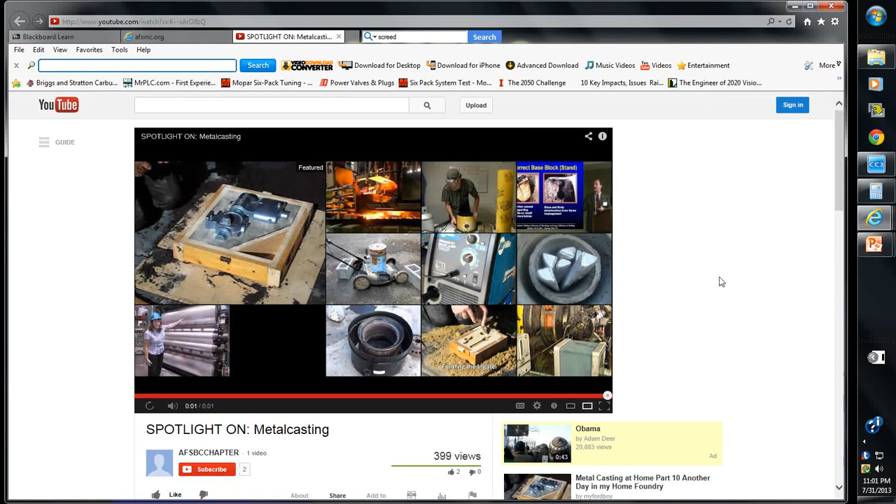Well, maybe not. I don't want to wait all day. I don't have time for this. I guess, no. It's got all these other castings, which we'll show you later. I've got some, but geez, you play that once and then you can't get it again. Boy, that's interesting. So anyhow, I'm not going to worry about it.

Let's go back to what we were talking about. I can show you that later, but the main gist of it is they'll show you these different castings, and we have a lot of robotic arms now that help move all this stuff and save time, so people aren't exposed to all the nasty stuff, and we can make things quicker and all that. That's why we teach all this automation now in our curriculum, because that's where it's all headed.

All right, parts made in this manner are called castings, so that makes sense. A factory that specializes in making castings is called a foundry. Of course, all this stuff will be on the quiz, so you should pay attention.

The 6 main types of castings are, and there's more than this, but these are the main ones: sand casting, they call it green sand because it's not totally cured and set up, so it's not really green in color - you'll see that it looks like red clay. Shell molds, permanent molds, investment casting, which has been around forever.

Plaster, you use gypsum, that white plaster, and it gives you a nice smooth finish. And then die casting, so you want to speed it up and do some die casting with the different pot metals - metals that melt at a lower temperature.

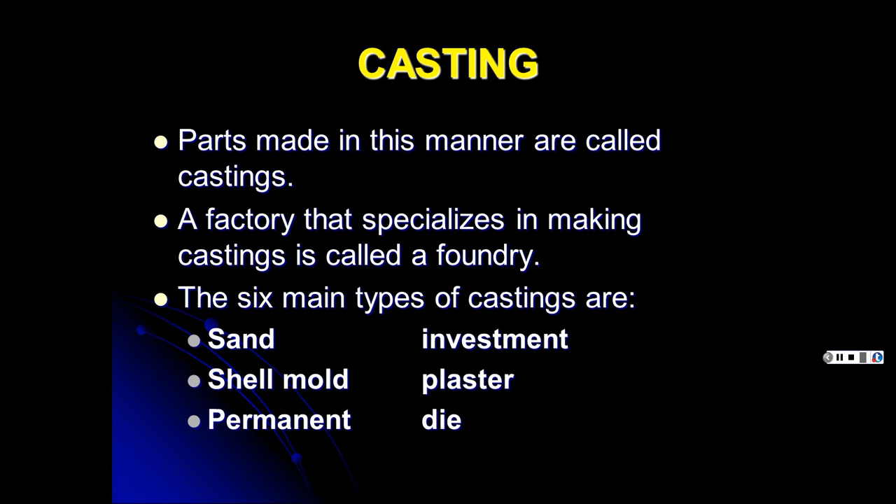Alright, so the different equipment, again, I think I asked you all these. I give you the definitions, you have to tell me what it is. Let's see, a mulling machine is used to thoroughly mix and recondition sand prior to making a mold because it clumps up, so you got to break it back up so it's not all clumped up.

And then a riddle is like a wire mesh, wire screen sieve that is used to separate the big chunks of sand from the smaller granules. I'll show you a video so you'll understand what this is all about. So that's a riddle. Riddle me this, Batman. Okay, so anyhow, why don't they just call it a sieve?

Yeah, I don't know. Flask is the frame that holds the mold. There's 2 halves of the mold - the top part and the bottom part. The top is the cope, and the drag is the bottom. You can remember that because you're always dragging your arse, right? So that's the bottom half. And cope, you have to cope with things, you have to use your head, so that's the top half. You should get that right on the quiz.

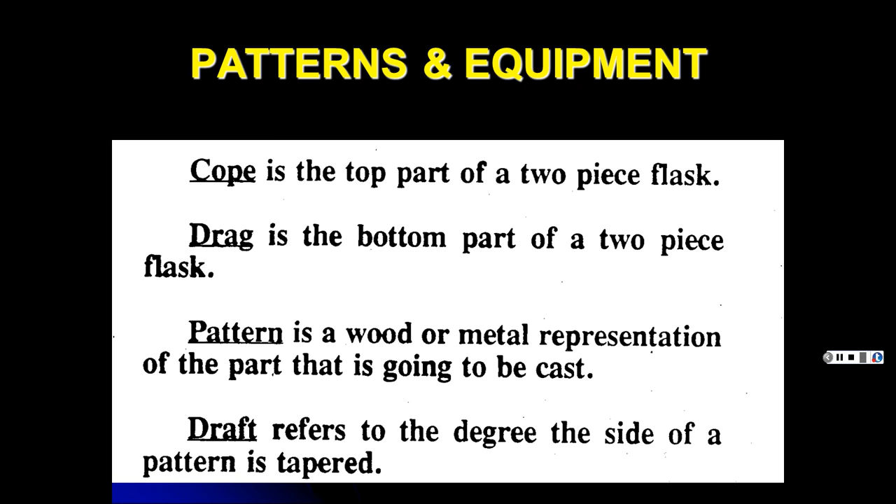Pattern is a wood or metal representation of the part that is going to be cast. So you have this pattern and it's cut in half because you'll see when they do the 2 molds and then you pull them out. So then when you put the 2 mold halves back together, that way you can take out the pattern. Then you have a hollow cavity, and the molten metal will go into that hollow cavity created by the pattern. You have to have some type of draft angle or you can't pull out that pattern if it's perfectly square. You'll see what we're talking about in a minute.

Then you have a shrink rule. Is that a rule that has shrunk over the years? No, what they're saying is when metal's hot, it expands. So you got molten metal, then you pour it into your mold there. And what's going to happen? Well, that metal's going to cool, it's going to shrink, and depending on the metal, it shrinks so much per inch. So there's different shrink rules.

One is for every foot, it's an 1/8 inch bigger, and one, it's for every foot, it's a 1/4 inch bigger. So that way you're intentionally making your pattern bigger than it really needs to be because the metal's going to shrink later. So anyhow, that's what a shrink rule is - it's taking into consideration how much it's going to shrink.

All right, then your parting compound is a fine powder, like talcum, something like that. There's different types we'll talk about. That is used to keep the molding sand from sticking to the pattern. You'll see in these videos they pour that white, talcum-like powder, and it's because you'll have those two halves and you don't want them to stick together until you pull your pattern out.

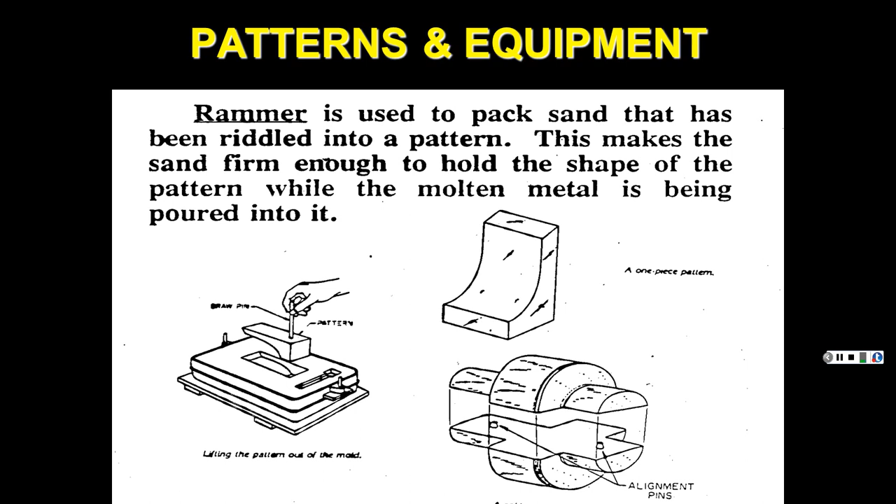Then you have a gating system. You can't just pour it right into the mold. You've got a sprue, and the riser, and all that gating system.

The reason you have that is with any type of metal, there's impurities and junk in it that floats on the top, slag and all that stuff, just like in welding, we talked about slag. So when it gets really hot and goes into your mold, all the impurities want to rise up. So then you have that riser, and all that junk's up there, away from the actual part in the middle.

You have to cut off these parts later, but that keeps all the impurities and junk out of your precious little part that you're making.

So then you'll form a pouring basin, because you'll notice with the ladle that holds that hot molten metal, it's hard to get it exact when you're pouring. You want to stay away from that heat and the flames and all that. You'll see they've got tongs and holders holding that ladle and pouring it for people.

Or if it's a small amount, you can do it by hand. But again, you don't want to get real close to it because it's super hot, and it can splatter. You don't want to get that all over you. I don't care what kind of leathers you're wearing and what have you, it doesn't feel good to get burned with molten metal.

So you have that kind of tapered, and then you have the sprue that goes down into where your pattern's going to be. Again, this is all stuff that you've relieved, you've removed that sand out of your mold, so that way you've got a place for all this stuff to run into your hollow cavity that was created by your pattern.

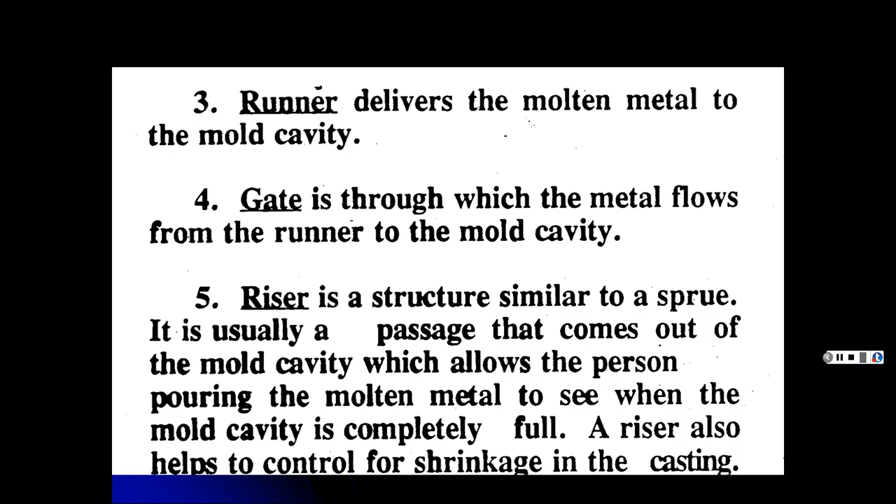Alright, so the crucible again holds your molten metal and pours it, after you've heated it up in your furnace. You can have electric furnaces, gas furnaces, you name it. There's all different types of foundry setups.

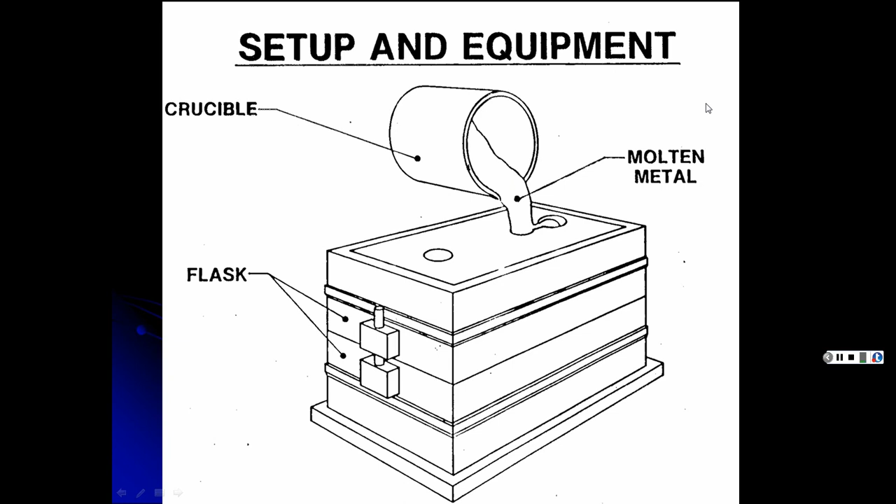But again, the crucible holds your... and the flask holds the two parts of your... I keep thinking flask, I'm sorry, I get confused sometimes. I think of a flask as something where you have a nice liquid that helps the day go by, hidden in your sport coat pocket, and you take a few swigs. So no, that's not it. That has the mold, the liquid in it. No, the crucible does, here when we're talking casting. Alright, and you pour your molten metal from it. So sorry about that. Anyhow.

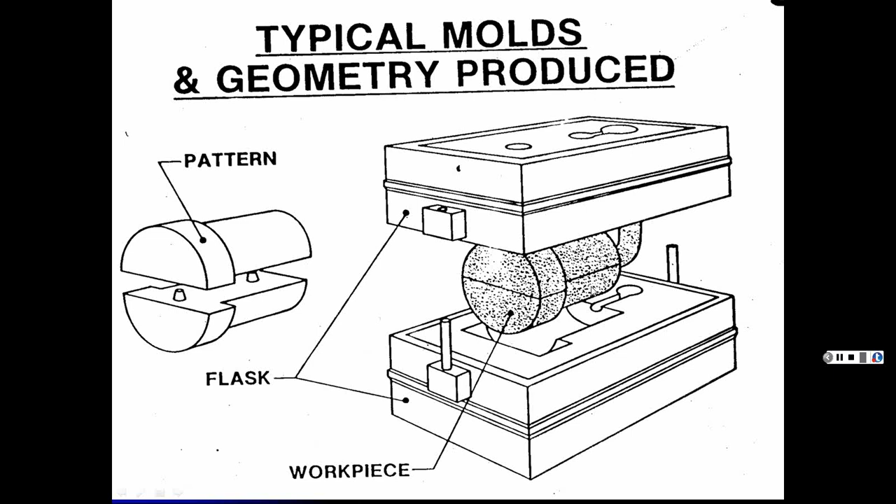And again, there's your pattern, see the alignment pins there, and they're just put together. Then you have to take these apart, take out the pattern, and put it back together again to leave the hollow cavity. But while you're doing that, that's when you also dig out these gates and runners and all that stuff, your whole gating system, which they'll show you in the video clips.

Alright, keep moving here. Let's see this one. This one is, I think, from the University of Memphis or one of those places. They made a YouTube thing, so it's pretty good. You'll see a few things that are out of whack, but it's okay.

And then this one shows you a place where they have some more equipment. It makes it easier to make a sand casting. So let's see if this works today. Hopefully. Alright, let's see. Boom, boom, boom. Yeah, here's their furnace, a gas furnace.

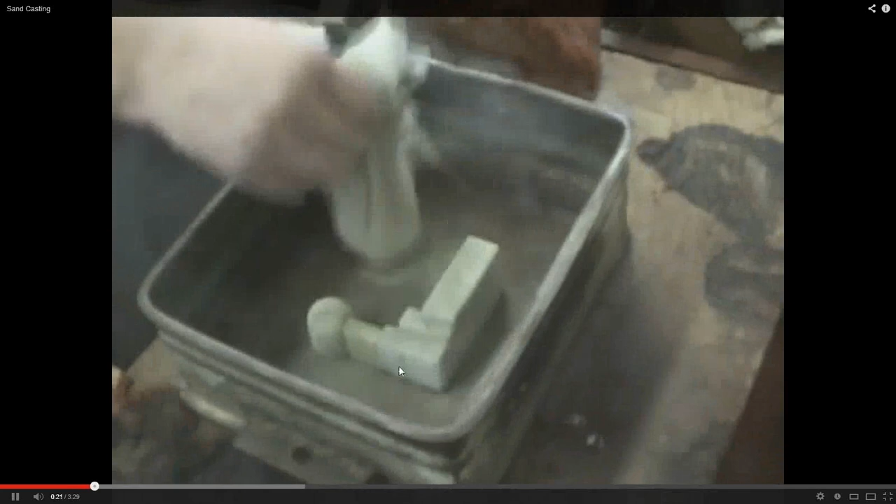Oh, they've got music here. There's their precious little part that they're going to make, but that is their pattern. Now they're supposed to keep that straight, but anyhow, usually you put it down with a little of this material to keep it straight. But that's okay, and they put that compound around it, so the mold release I guess.

And see, here's the riddle, and then they've riddled that in there. And see, it's not really green sand, okay? They screed it off to make it flat there. They're melting whatever scrap they had left over.

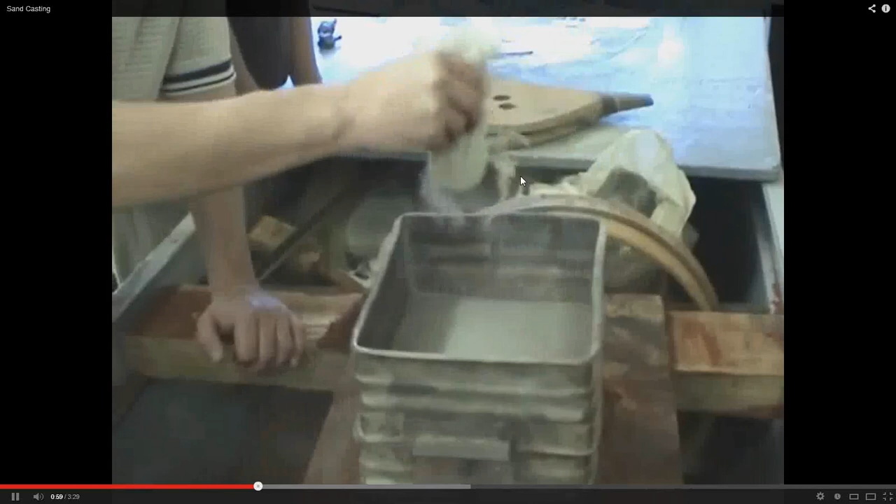Okay, and there's their pattern. They're putting some more on so that way it won't stick. They're riddling in the green sand. As you can see, it looks more like clay, but it's sandy.

But usually they have an oil binder to it. And see, now they're making their pouring basin and their sprue. And there's their riser.

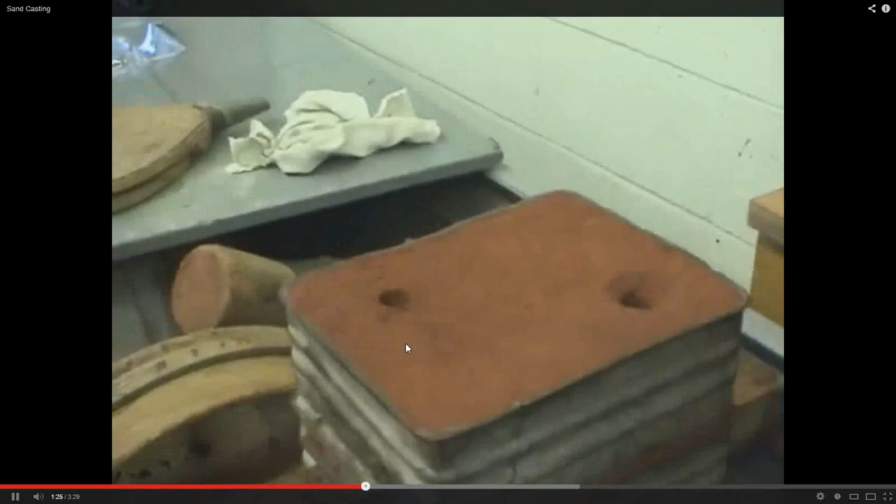And they take them apart. They're going to take out these patterns. But first, they're making a gating system, so the runner goes into it, and then it just goes right in, and then they have to press that down so it's not going to come apart on you.

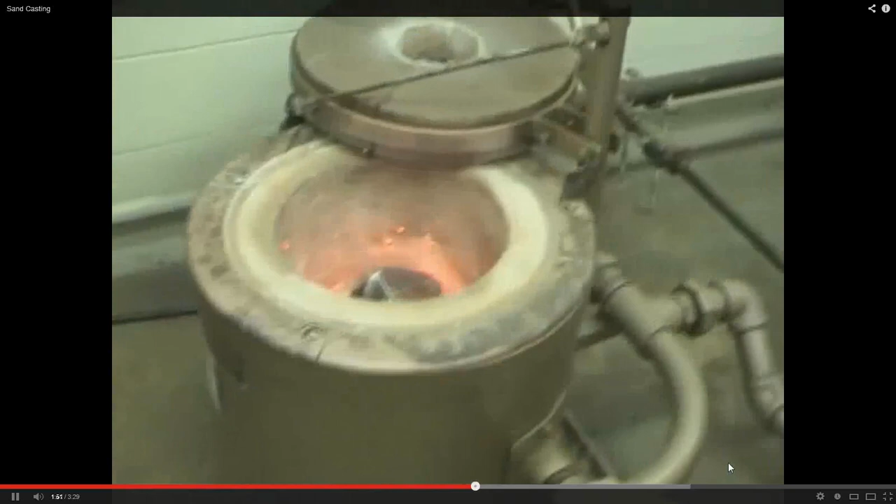You'll get it ready. And you always have a piece of wood or something under it. Same for when they put down their crucible. You should never put a hot crucible down on concrete, because concrete is cold.

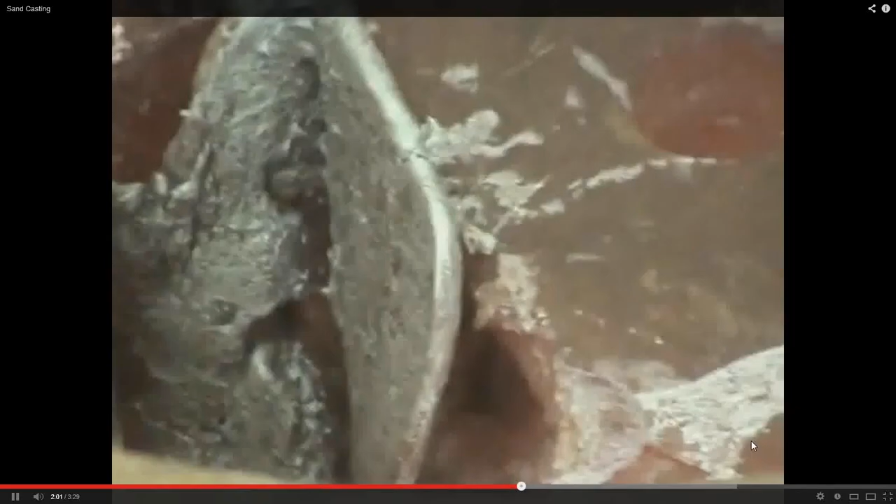And the heat and the cold, what happens to concrete? Concrete explodes. So they got lucky here, but I don't know if I'd do that. Maybe it's treated with something, but you just don't. Oh, I see it's got a metal piece under that, but still, that's pretty hot.

Pouring the aluminum in there. See, then there's the riser that filled up. And he's got sneakers on. Is that a wise choice?

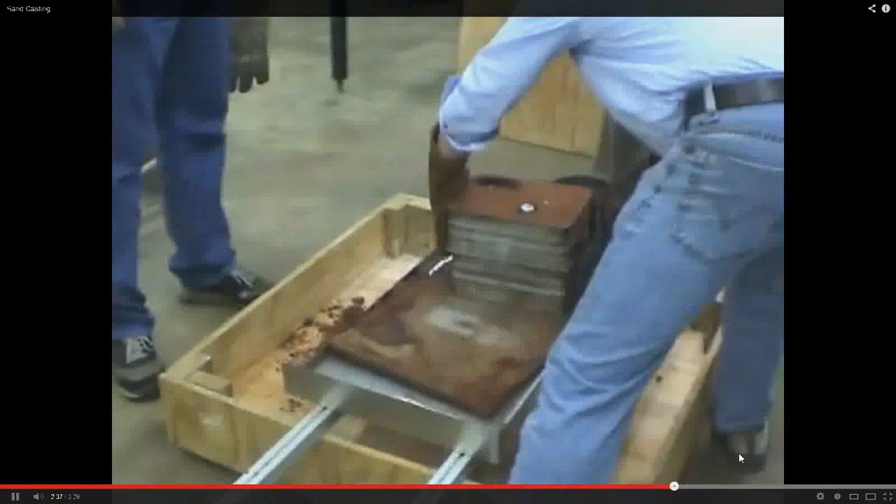They do have these covers, but still, I would have more protection. Everybody always wants to take it out real quick. Your best bet is to, if you can, let it gradually cool, and then the molecular structure and everything is good. But they're just showing you how it all works.

There's all this gating system that they'll have to cut off, the riser and the... A little too much music there.

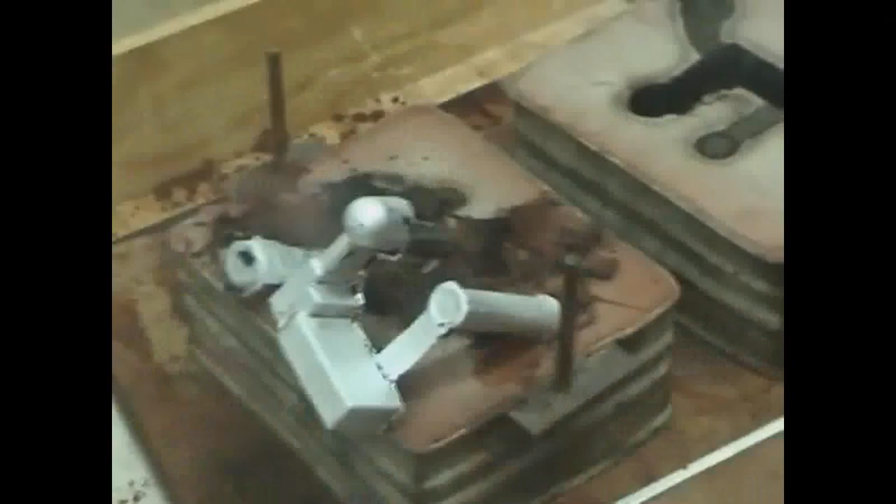Alright, but anyhow, there was their pattern, and then there is their actual part there. Not bad, it came out good. Then they're grinding it all down, sanding it all down, making it look nice. I don't know what they're doing with it. Hopefully they're making something with it.

But anyhow, enough said there.

Alright, so we'll make this smaller here. Let's get back to reality here. Alright, and the other one you will notice, you will see they have some equipment that makes life a lot easier.

This video shows the sand casting process to make a mold to produce aluminum castings. This particular item is a handle for a snake catcher. The match plate makes 4 handles at one time.

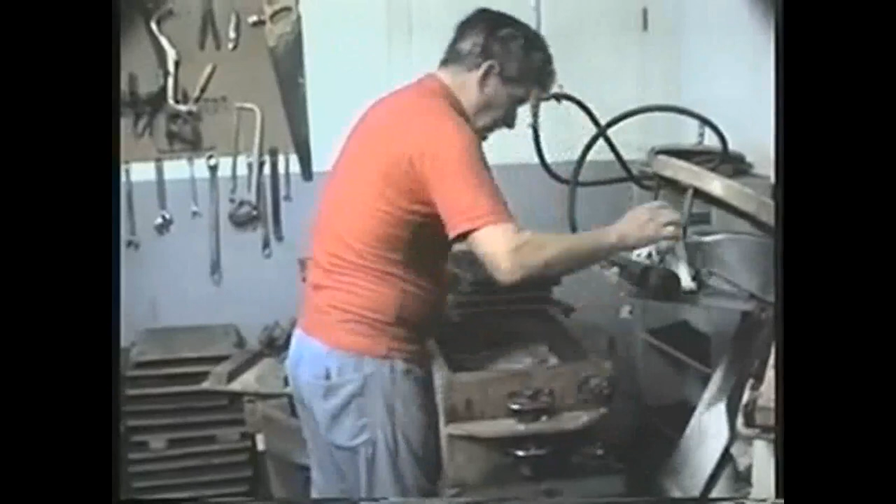Isn't that nice? Once the match plate is set between the 2 halves of the wooden flask, the molder dusts a non-silica parting compound on the pattern so sand won't stick to it.

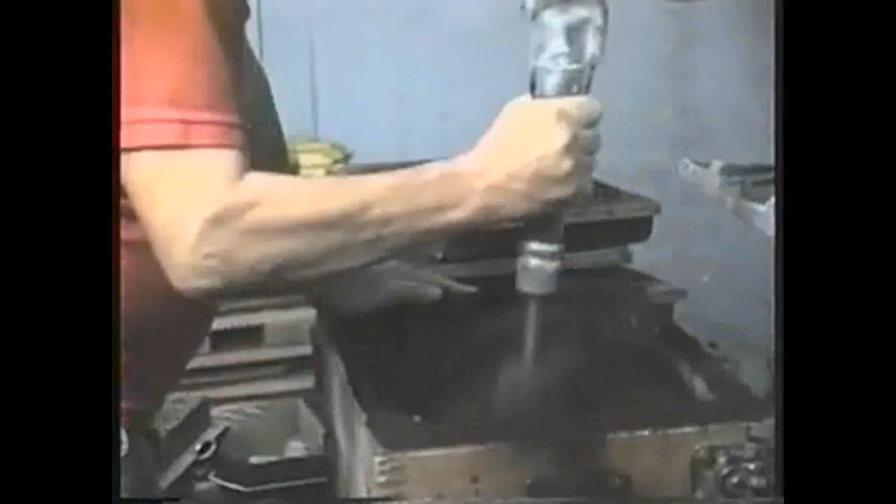To get only small particles of sand against the surface of the pattern, he riddles moist sand, which is coated with bentonite clay. The clay bonds the sand grains together so the block of sand will not crumble. There you go. He uses an air rammer to compact the sand.

That's much better, a better setup here. Now this is a better sand where it's got the bentonite in it.

To further compact the sand, the jolt squeeze molding machine jolts the mold. Yeah, there's the jolt. It sets on a bottom board which will end up underneath the mold.

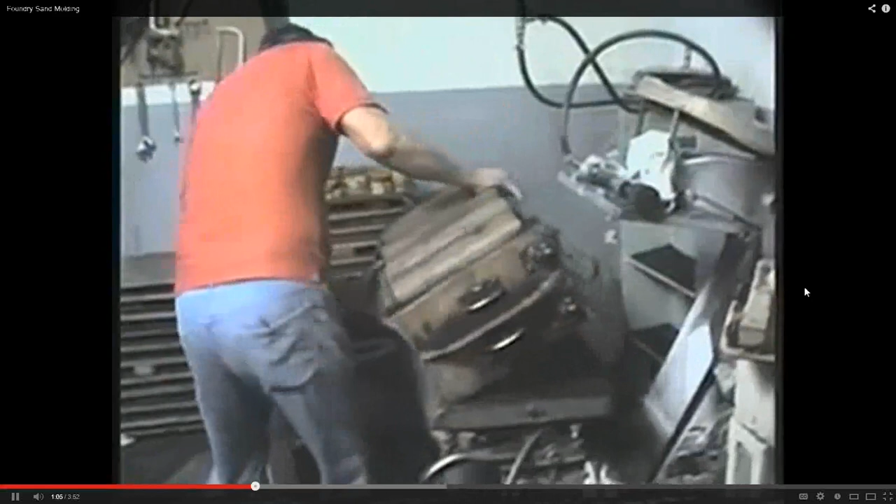That way they don't stick. He's riddling it in there. Oh, this guy loves to make the job right.

To make the top half of the mold, a cope, he repeats the process: parting dust, riddling facing sand, and compacting backup sand.

That way he gets it. He sets a squeeze board on top of the mold. The jolt squeeze machine pneumatically squeezes down on the squeeze board and up on the bottom board to further compact the sand. Can't beat that.

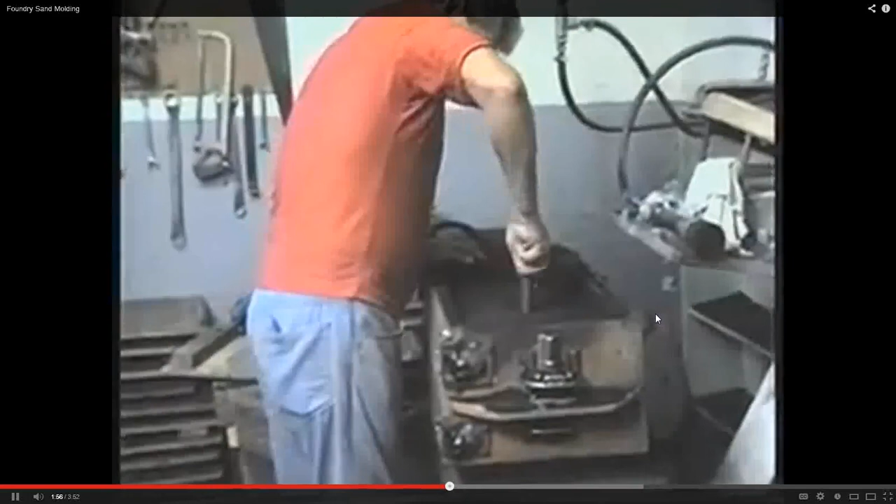The top squeeze board left a depression on top of the mold for a pouring basin. Yeah, look at that. The brass tube, which is pushed down to the match plate, cuts a sprue passageway for molten metal to enter the mold.

An air vibrator attached to the match plate helps prevent sand from sticking to the pattern. When lifting up the cope, or top half of the mold, alignment pins on both sides of the flask allow a perfectly straight lift.

Yeah, because if they get crooked, like I said, it throws it off or it breaks off the sand. So then he's cleaning out all the rest. He's got compressed air there.

Yeah, this is set up just to make castings. The same alignment pins guide the match plate when it is lifted. It kind of vibrates a little and gets it up, and it's got air again, compressed air. He cleans it out, and then notice here.

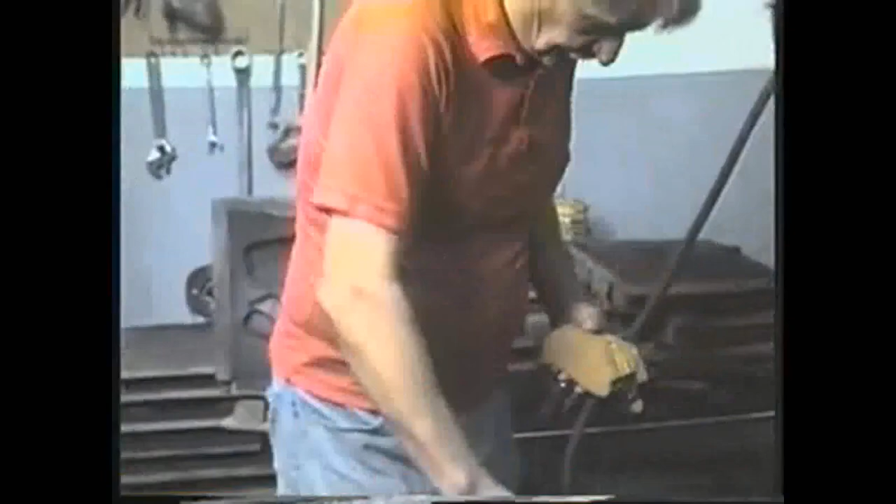They don't want to make those handles solid metal, it'd be too heavy. Each of the four castings, snake catcher handles, has a slot for a trigger. This slot is formed by setting hard resin-coated shell cores in the mold.

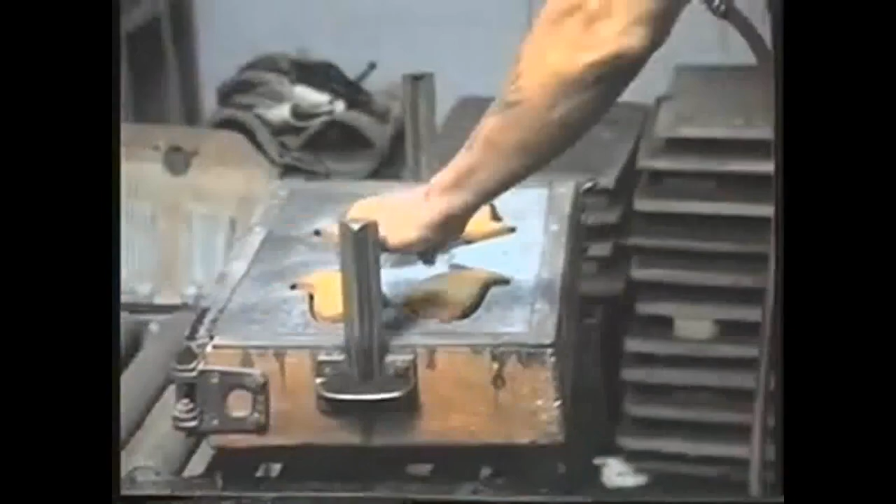Where there is a core, metal will not fill the space, hence a slot. You don't waste all that metal, and then it's lighter. By the same token, any loose sand in the cavity will prevent metal from completely filling the cavity and will cause a dimpled surface. Blowing away loose sand before pouring the metal is very necessary.

The two halves of the mold, cope and drag, are aligned by the flask guide pins. By unhinging the flask and removing it from the mold, the flask is ready to make additional molds. See, when he does his pour, he's got a whole bunch of them he can pour at once.

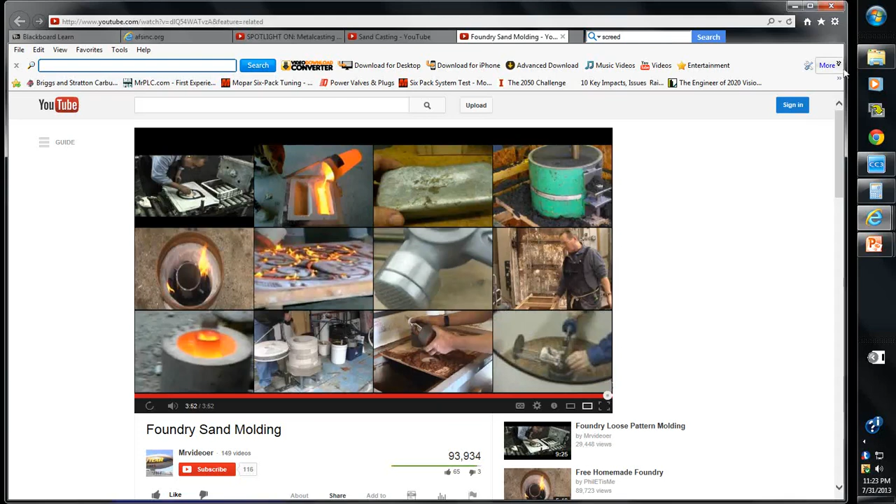All right, so that kind of gives you an idea what all of this mess is about. Sorry about that one. Okay, anyhow, let's get back to reality here.

So sand casting in general, there's sand in there, so you'll notice the texture is rough. Like if you look at castings for our machines, they kind of feel rough because they were sand castings, because it's the quickest and easiest way to make those parts as fast as you can. It does have a rough texture, and usually that's fine, it doesn't matter. If you want, you can machine it later to make it smooth, but in most cases you don't have to if you're just making a big base for a machine.

It utilizes gravity to feed molten metal into a non-reusable mold, as you saw what we did there, because of the sand. But then you can break up that sand and reuse it again.

Sands contain binding materials - we talked about the bentonite and the oils in them. It requires a reusable mold pattern, which you can pull out and leave that cavity. It produces a parting line on the workpiece, and the parting line is where the two mold halves go together.

It's going to be a little rough, you just can't help it. It requires drafts - you have to have draft angles, or you can't pull those patterns out without breaking off some of the sand and everything else. It produces rough textured surfaces, because sand is rough.

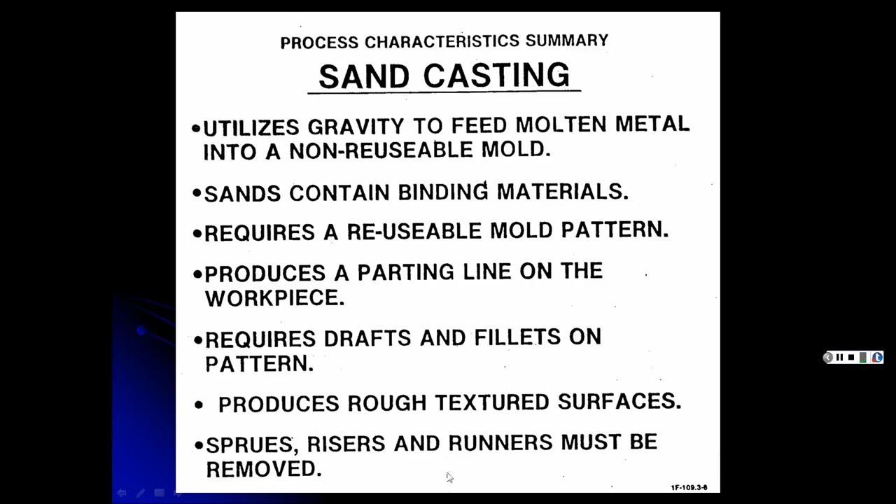And sprues, risers, and runners must be removed later. You cut them off and then melt them down so you can use them for the next one.

And again, that jolt squeeze turnover machine, you saw that in action in the last video. So that's what they're talking about, how all that worked - it just makes your life a lot easier, really compressing it perfectly versus somebody there with a stick trying to get the same equal force.

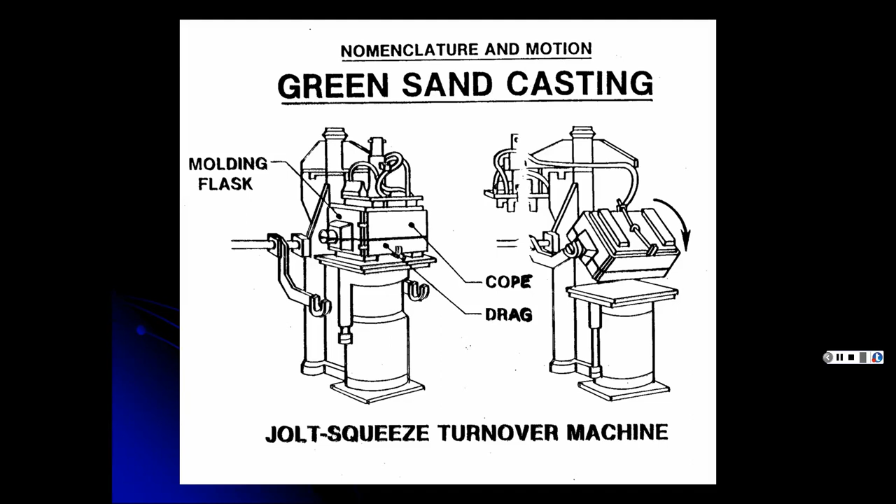What that does is put pressure around your pattern so you don't have loose sand around there, because when you take them apart, you may have a spot where it didn't compress the sand enough, and that's going to make a bigger area because that sand will fall out, giving you a bigger casting than you need - then you've got to grind and machine all that down. So that's why that's important, and if you do this for a living, yes, this is nice.

Different types of patterns, because you're going to remove them. It can be wood if you're just making a low production run, because the wood will wear down eventually if you're making a lot of these. It can be metal, aluminum, iron, steel. You can also make plastic epoxy resins if they're really complex.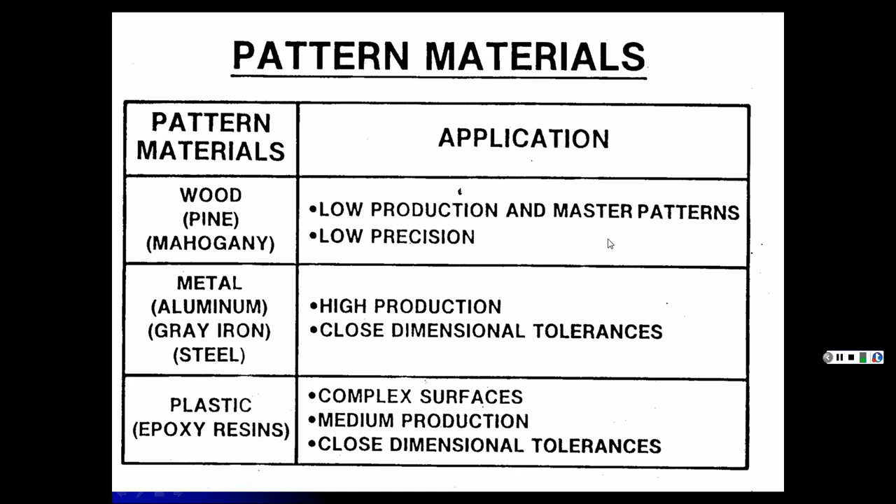Again, this stuff is going to be pulled out. A lot of times we can make molds out of flexible plastic, and then not have to worry about draft angles - just bend the plastic mold and pop them out. But again, we're not talking about that here, we're talking about sand castings. These are usually typically for bigger, larger parts and what have you.

Process capability, accuracy of patterns, including the cores and inserts - if it's done well, then that's less you have to machine later. You have to worry about casting shrinkage, so you got to make sure you got that under check. Pattern smoothness, how smooth your pattern is, but you still have got sand to deal with, so you're still going to have some rough parts there.

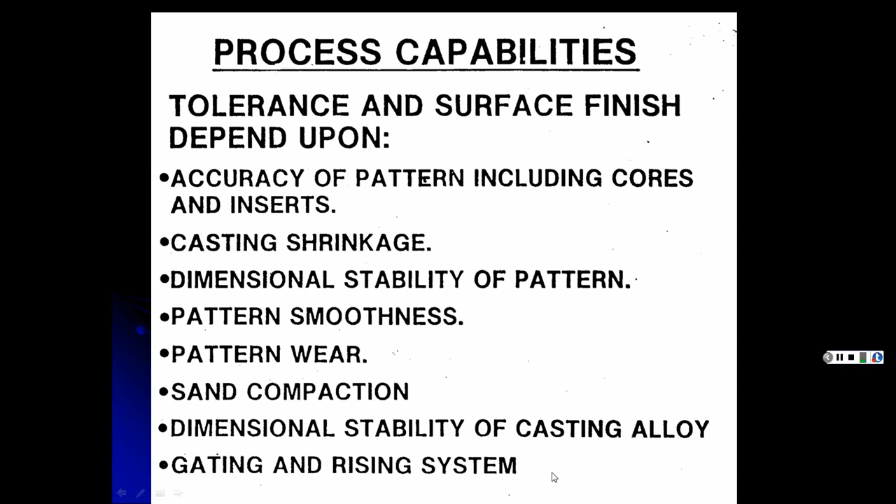So then your gating and rising system, depending on how well you have that, if you're getting enough metal in right and correctly to fill up that cavity before that metal cools too much. It's amazing how the gating and rising systems work, and how the craziest looking ones seem to work the best. It just really doesn't make sense sometimes.

Core sand castings - that's for when you make it actual out of sand as well, the cores, those hollow cores that are going to go in there. Well, they're not hollow, but it's going to make it to where you're putting that sand in the middle of where that pattern would be, but not the whole thing, not filling up the whole thing. And so that's allowing for hollow parts that you wouldn't have to machine later.

For instance, an engine block, you've got that casting, but it's not all one big solid piece of cast iron. They put cores, let's say it's a V8, 4 on one side and 4 on the other side. And then all they got to do is maybe machine it a little bit and hone it. But all that material is not metal. Can you imagine having to machine all that out?

Well, sometimes they do for exotic engines made out of certain aluminum alloys. They take a big block of special grade aluminum and machine them all, especially for a lot of those Top Fuel and funny car engines. But that's, you're making a lot of money off of it. This is something, you know, a car, you got to keep down the prices. People aren't going to pay 20, 50, 100,000 for a motor.

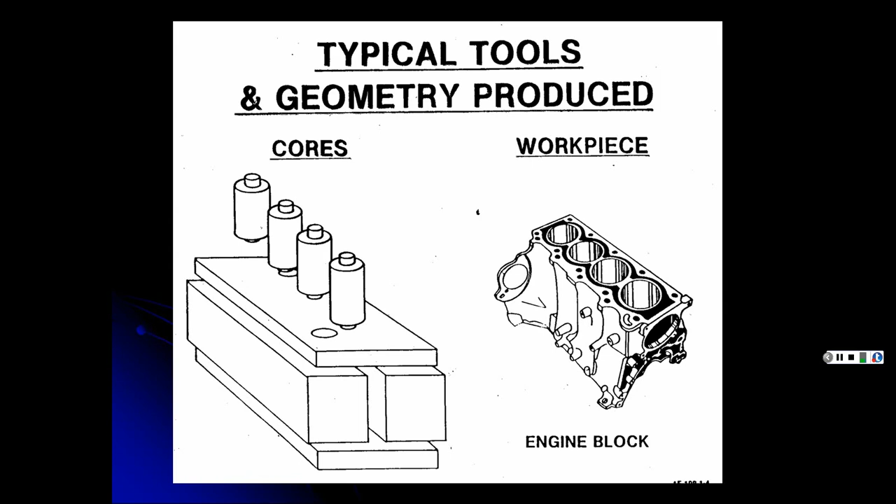All right. Yeah, this shows you the cores and where they would go in there for where your cylinders are.

So core sand castings utilizes core sections to form complex molds. Cores are made of hardened or baked sand. It produces shapes unattainable through other casting processes. It's a low production process. Cores are assembled with glue or steel bands sometimes, and can form parts requiring more than one parting line because of the way that it's all put together.

Then we have no-bake mold casting. This is a process wherein molten metal is poured into a non-reusable mold made from a mixture of sand, quick-setting resin, and catalyst, and held until solidification occurs. What this does is it keeps it all mixed up, you know, like it's an epoxy. And so if you pour this all in there, it's going to form right around whatever it has to, and you're guaranteed a nice, perfect casting.

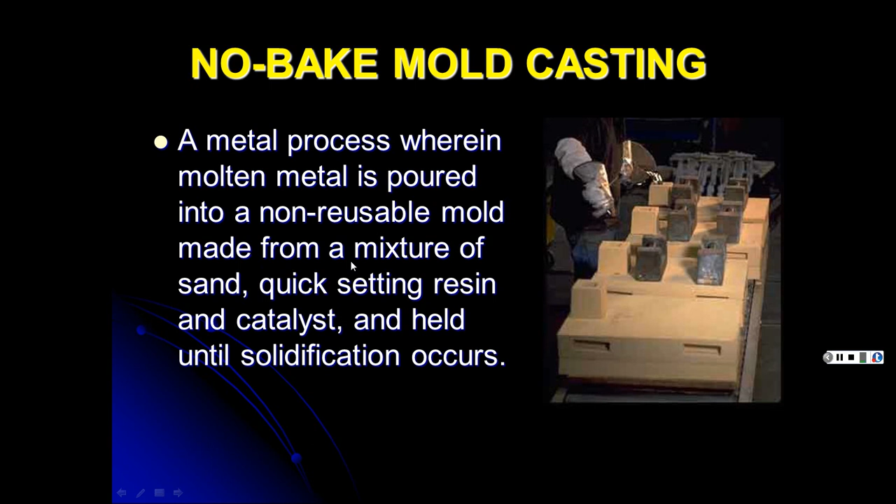Because with the sand casting, the green sand type, you could still, when you're doing that and moving it around, a piece could break off or something - it's not perfect. But since this sets up just at room temperature because it's got a catalyst to it, you're going to get a perfect casting every time. Of course, it's more expensive because you can't reuse this sand that's set up, it's done. So it just depends on what you're trying to do. If it's expensive parts with special alloys, you got to pay the price. Or let's say your cores keep falling apart or something, and you want to make them out of no-bake, hey, that's fine.

Same thing, no-bake versus sand casting, tells you the reasons for it. It's more expensive, but it gives you better, closer tolerances. It's a finer sand mixture, so it gives you a smoother finish, and again, they usually come out perfect every time versus a sand casting. It's kind of rougher, and sometimes they don't come out perfect. But the drawback is, again, the no-bake is more expensive.

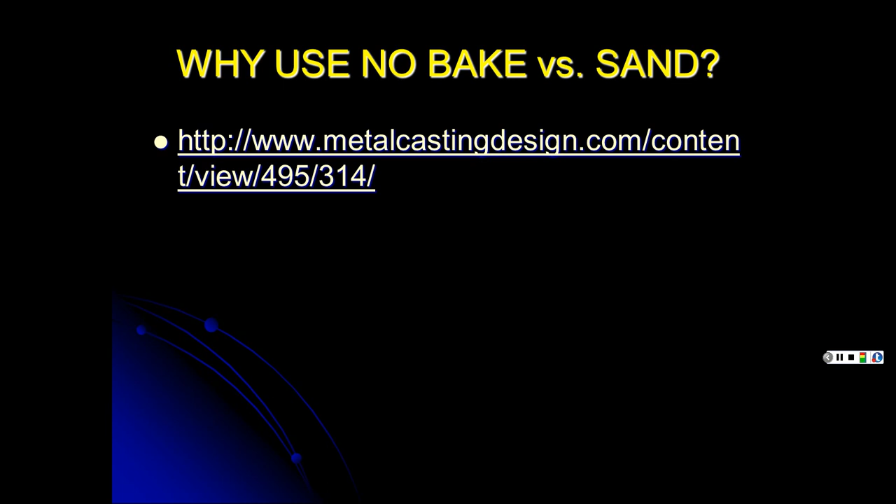Why they call it no-bake is you'll see that we're going to do another casting process where they heat up the molds or bake the actual patterns that they make and melt them out of there. There's some ovens involved ahead of time before they use a furnace and pour the molten metal in. So that's why they call this the no-bake. It's where it's mixed with a catalyst, you don't have to heat it up or anything. So that saves money there, but then you're having to pay for a catalyst, which is expensive.

So no-bake mold casting utilizes gravity to feed molten metal. It's the same as green sanding, except for molding, sand is poured into the mold instead of being rammed. Okay, so that way it's poured, it hardens, it's going to come out perfect. The other one, depending if you rammed it just right and got it all the way around your pattern right, a chunk may fall off, and then you have extra molten metal that's going to be in there later.

Molds are chemically cured at room temperature. Again, you don't have to bake these. Dimensions are usually precise and repeatable, reduces labor costs, has high casting yields, and produces less scrap. And that's the beauty behind that. So it may outweigh the cost of all the sand that you're going to have to throw away.

All right, shell mold casting. Here's another way of doing something, and obviously there's a shell mold involved here. It's a process in which molten metal is poured into a heat-cured, non-reusable shell mold made from silica sand and, again, a resin binder here, and then held until solidification until it gets solid. Now, what the difference is here is they took the no-bake and found a way to save money.

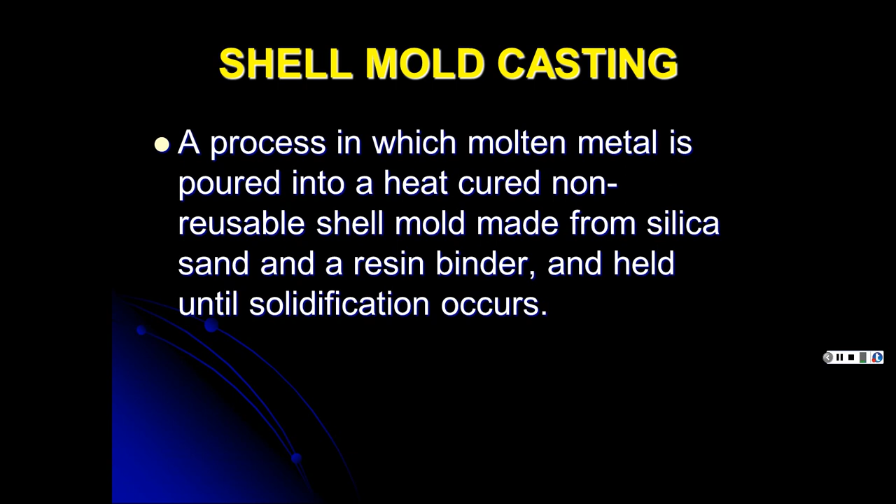And what are you getting at here? Well, they have the actual casting that's going to be inside. So what they'll do is they'll take the pattern, and it's usually a heated pattern made out of metal, and then they put it in this one's a dump box of the material. Yeah, it's the same material there. And because it's hot, that sand resin mixture...

Cures to a certain depth, depending how hot it is and how long you leave it there exposed to the heat, and it makes a certain thickness. Then you take it out, and you haven't ruined the rest of this material, you can use it for another one. Then you just fill it with a backing material, inexpensive backing material of sand that you can reuse all the time. So think about it. What we've done different here is we're not using as much of that epoxy type sand that you have to throw away. The other one would fill up this whole thing.

But you do have to go and heat up a pattern. It has to be a metal pattern. The other one could be a wood pattern. With the mold release on it, you take it out. Here you actually have to machine something that can be heated up and then have this around it, that'll cure around it. Then you take your molten crucible, or ladle if it's smaller. That was the word I was trying to think of, I had flask on the mind there.

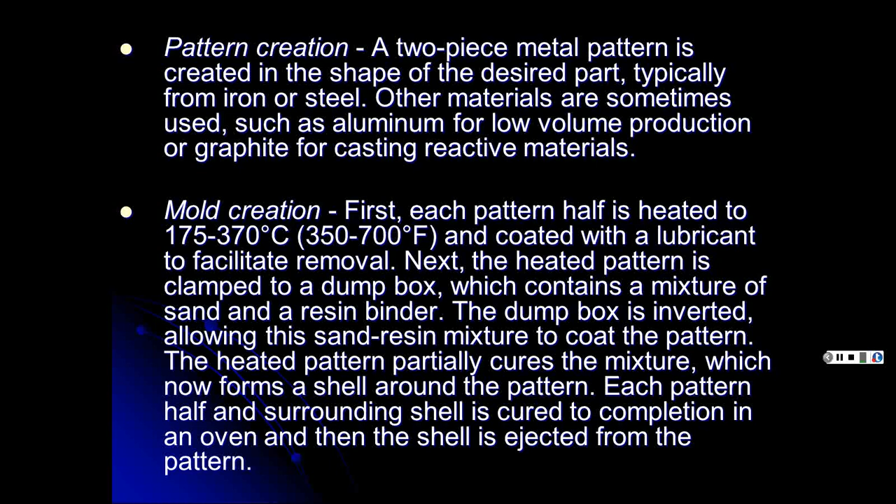Then each pattern half and surrounding shell is cured to completion in an oven. After you have that part that comes out about half an inch or an inch, that form, then you heat it in an oven just to make sure it's fully cured.

Then the two shell halves are joined together, remember they're hollow. They're clamped together, and then you put that supporting backing material in there, and you're good to go. Then you pour molten metal from a ladle or crucible into the mold, and let it cool. After the molten metal has cooled, the mold can be broken and the casting is removed, trimmed and cleaned, and you're good to go.

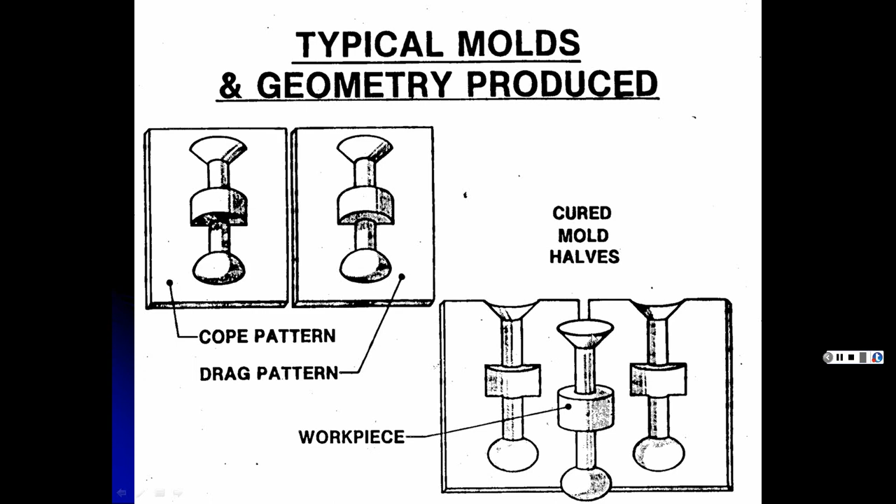This one looks like it has... yeah, no, this one is hollow. It's going to be one solid piece. This part is our actual mold. We removed the pattern, left this hollow cavity, and then this is the backing material, which could just be green sand. It doesn't matter.

It's superior to other sand casting processes in the duplication of intricate shapes and dimensional accuracy. The process can be completely mechanized, uses a thin-walled, non-reusable shell made of a sand-resin mixture, and requires a heated metal pattern for producing the shell molds.

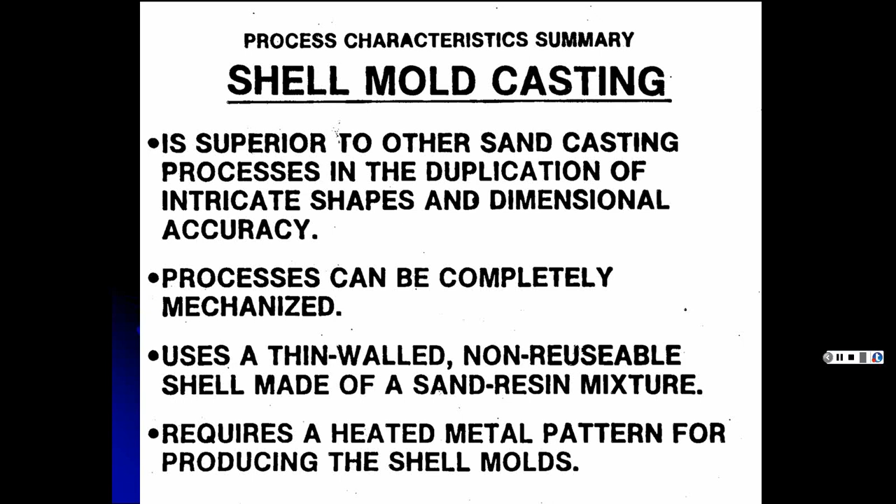The Germans came up with this idea in World War II because they couldn't use as much material. At the time, we were bombing their factories with B-17s and so on all the time. So anyhow, they came up with a lot of neat ideas. It was more accurate, so it took them less time to machine things, and they could make different parts for tanks and you name it.

Then we get into permanent mold casting, a process in which molten metal is introduced into a permanent, reusable mold. Here, all the others have been non-reusable, haven't they? But this actual mold we can reuse. It's poured in under gravity or low pressure and held until solidification occurs.

Permanent mold casting is a metal casting process that shares similarities to both sand casting and die casting. As in sand casting, molten metal is poured into a mold which is clamped shut until the material cools and solidifies into the desired part shape. However, sand casting uses an expendable mold which is destroyed after each cycle. Well, it's just made out of sand, who cares?

Permanent mold casting, like die casting, uses a metal mold or die that is typically made from steel or cast iron and can be reused for several thousand cycles. Because the molten metal is poured into the die and not forcibly injected, permanent mold casting is often referred to as gravity die casting. Okay, but anyhow, that's permanent mold casting, where you just pour the molten metal in.

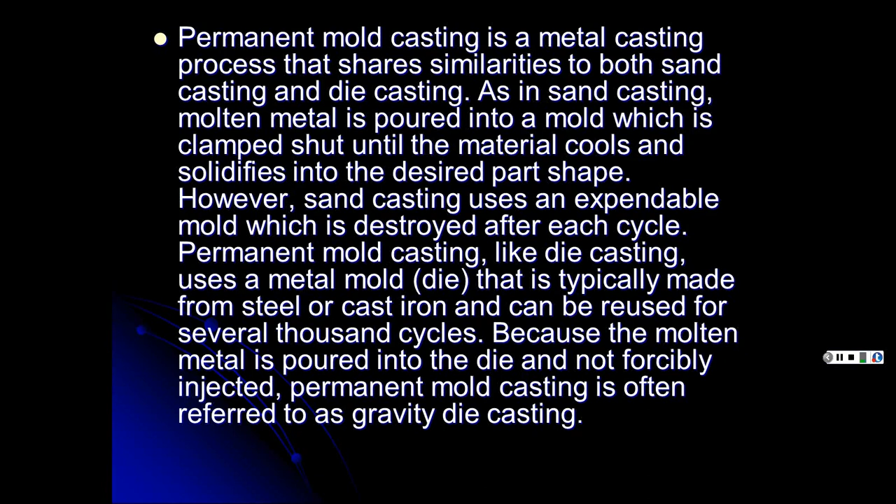Now, obviously, the molten metal can't be the same metal that the die is made out of. So these would have to be, what? Non-ferrous materials, because non-ferrous materials melt at a lower temperature.

Permanent mold casting is typically used for high volume production of small, simple metal parts with uniform wall thickness. Non-ferrous metals are typically used in this process, such as aluminum alloys, magnesium alloys, and copper alloys. However, irons and steels can also be cast using graphite molds. If you've ever played with graphite, your pencil lead and stuff like that. We'll talk about that when we're doing our EDM and stuff like that.

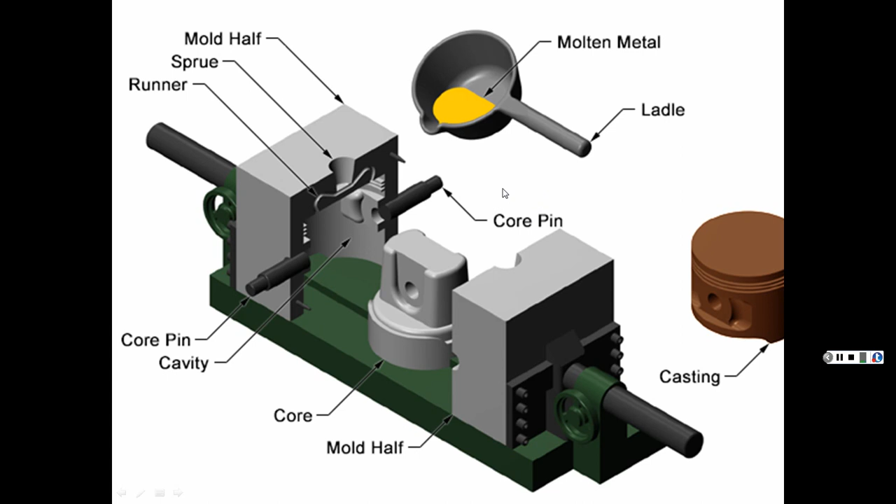Common permanent mold parts include gears and gear housings, pipe fittings, and other automotive and aircraft components such as pistons, impellers, and wheels. All right, and it kind of shows you - it's got this core part in here, so you've got the hollow cavity, especially if you're making a piston. You don't want that to be one big solid piece, that'd be a heavy piston, wouldn't it? If you've looked at a piston, the inside part is hollow. It's only as thick as it needs to be to withstand the force of the explosions from the engine, where you put the gas and air mixture and then the spark plug and all that. Alright, so there it is. There's more of a schematic, but that's kind of what it looks like.

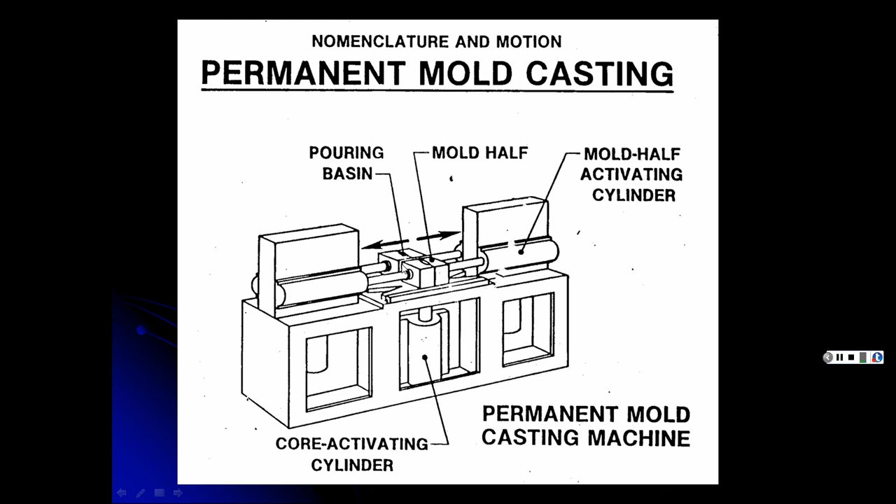The mold slides back and forth to open up, pop out, eject the part, and then comes back together again. You pour your molten metal in there, and there they are. See how it goes in.

There's the sprue, comes down a little extra, then here's the gating system. What they found out with round parts, and that's what we had to do with our round wheels for the plastics too, is if you just have one gate that everything comes in, it doesn't work as well. If you have two gates, one will go this way, one will go that way, they meet up there, and that way it fills up the wheel quicker before the molten metal cools. Otherwise you only get half a wheel.

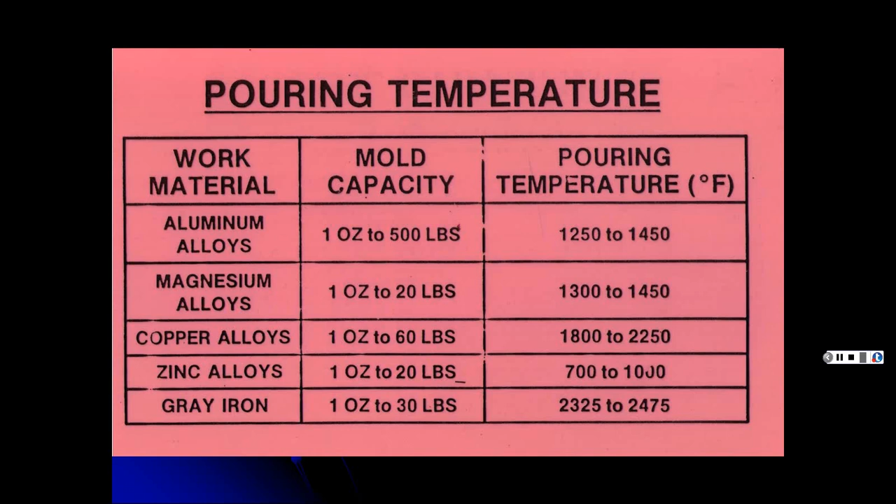You can either spray them on, brush them on, or you saw how they just use like a bag—say if you took a nylon stocking and filled it up with that talc, and that way you can just sprinkle it on.

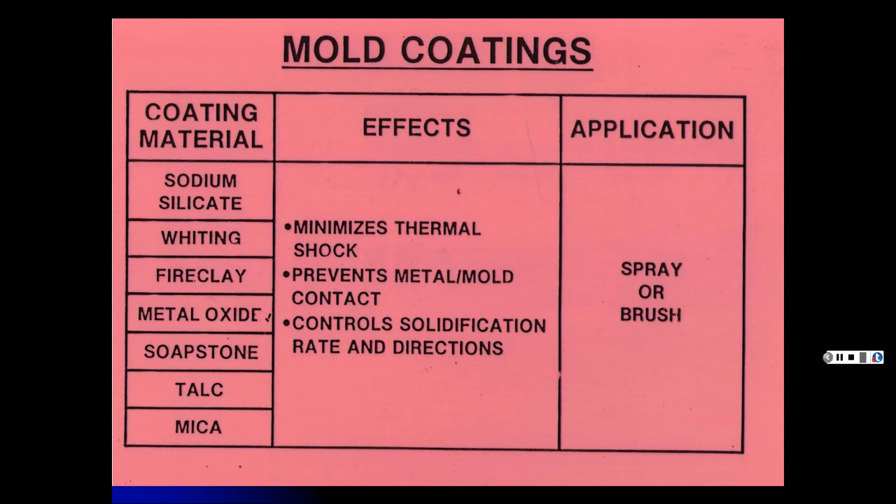Permanent mold casting: molten metal is introduced under gravity or low pressure, often using close grain cast iron as the mold material. It can produce good dimensional accuracy and smooth surface finishes. Castings have reasonable strength with low porosity, so we don't have a lot of air pockets in them. It's not very porous, but complex or irregular shapes are difficult to produce with this method.

Then we get into investment casting, a process in which molten metal is poured into a preheated ceramic mold, producing a casting which may have intricate internal and external features with little or no draft. That means we're probably going to break up these molds. When they're making specialty rings and jewelry, it's all done with investment casting. The ancient Egyptians did this—it's one of your first casting processes.

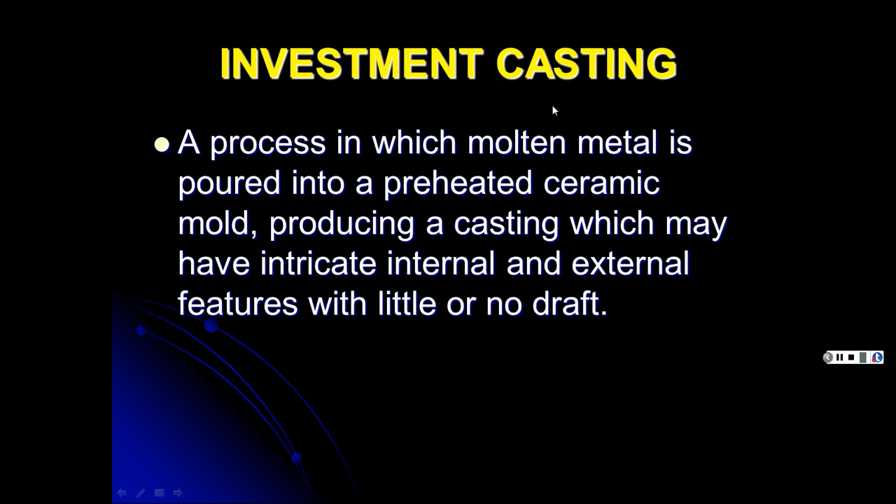Investment casting is one of the oldest manufacturing processes, dating back thousands of years, in which molten metal is poured into an expendable ceramic mold. The mold is formed using a wax pattern, because it's easy to carve wax or whatever you're making, or you make a pattern, a mold, to make your wax pattern molds. Then you can make as many as you like.

A disposable piece is made in the shape of the desired part. The pattern is surrounded, or invested, into ceramic slurry that hardens into the mold. Investment casting is often referred to as lost wax casting, because you heat up the wax pattern and melt it out of the mold in an oven. Then you pour it out, and you have a hollow cavity.

So the lost wax process is one-to-one: one pattern creates one part, which increases production time and cost relative to other casting processes. But think about it—it's easy to carve wax and make a cool looking ring of any type you want. However, since the mold is destroyed during the process, parts with complex geometries and intricate details can be created, so we don't have to worry about a draft angle.

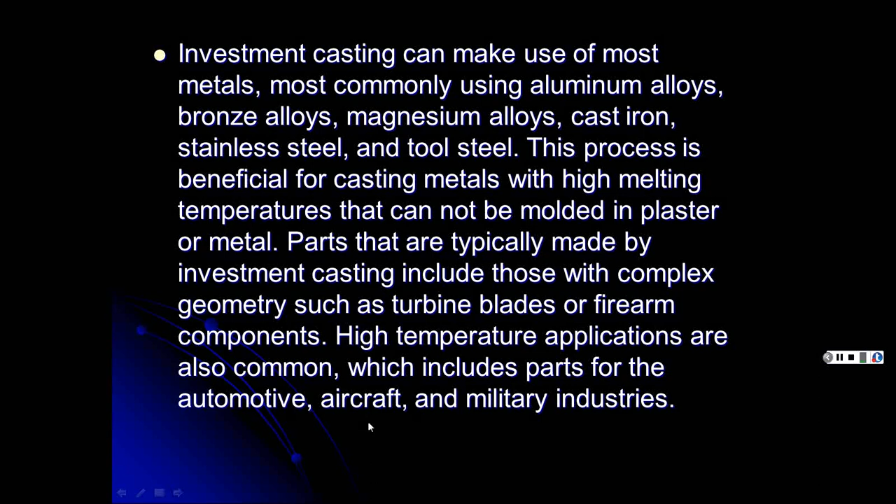Parts typically made by investment casting include those with complex geometry, such as turbine blades or firearm components. High temperature applications are also common, including parts for automotive, aircraft, and military industries.

Mold creation: this pattern tree is dipped into a slurry of fine ceramic particles, coated with more coarse particles, and then dried to form a ceramic shell around the patterns and gating system. This process is repeated until the shell is thick enough to withstand the molten metal it will encounter.

The shell is then placed into an oven, and the wax is melted out, leaving a hollow ceramic shell that acts as a one-piece mold, hence the name lost wax casting. So again, this time your pattern stays in there—you don't have to remove it. That's why we can just pour that ceramic slurry around it, let it dry, and heat it up.

Then we heat it up in an oven, and that wax melts, because it doesn't take much for wax to melt. You leave it out in the hot sun, it'll melt. So then you can pour out that wax, and you have a hollow cavity.

So the mold is preheated in a furnace to approximately 1800 degrees Fahrenheit. And the molten metal is poured from the ladle into the gating system of the mold, filling the mold cavity. Pouring is typically achieved manually under the force of gravity, but other methods such as a vacuum or pressure are sometimes used.

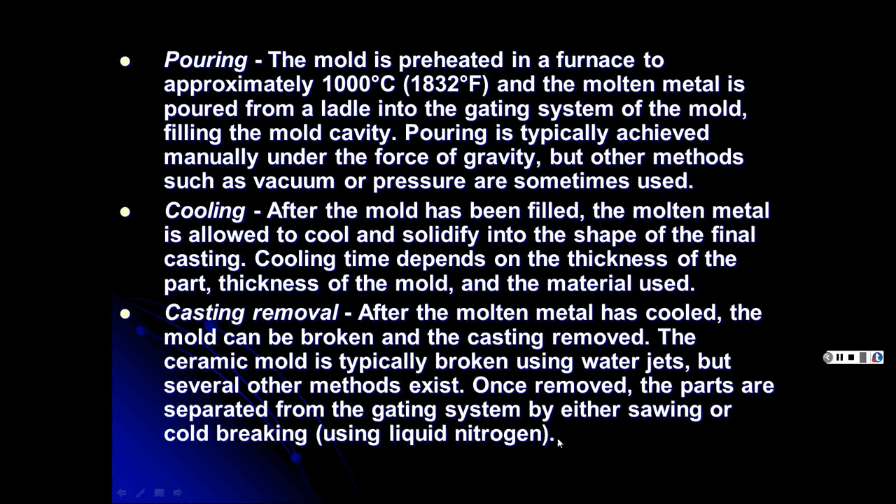Then you let it cool, and after the molten metal is cooled, the mold can be broken and the casting removed. The ceramic mold is typically broken using water jets, but several other methods exist. Once removed, the parts are separated from the gating system by either sawing or cold breaking, which I've seen done using liquid nitrogen.

Anyhow, yeah, watch your hands.

Then you don't have to have any draft angle on this. You can make it exactly like you want it.

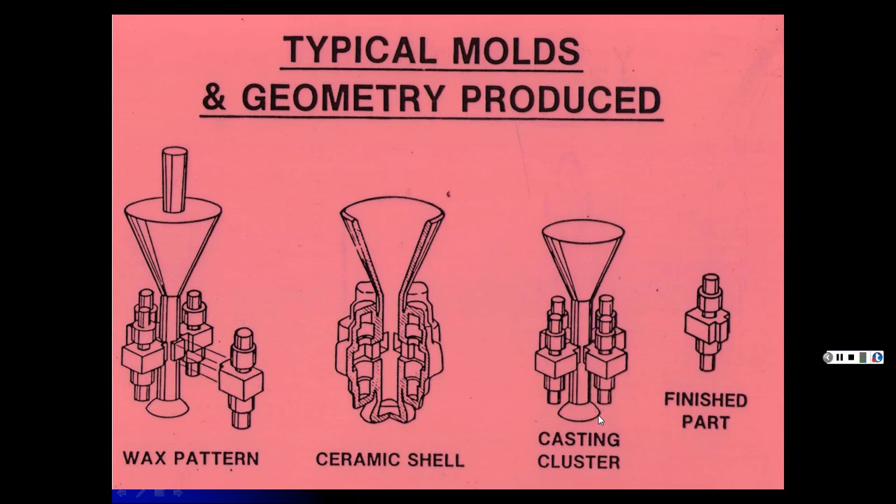So then they have to cut all that out, and they can reuse that again. But that's your finished part, and they're all clustered around this one gating system.

Before, then you pour it, and then you can make fine, intricate parts, nice rings, jewelry, you name it.

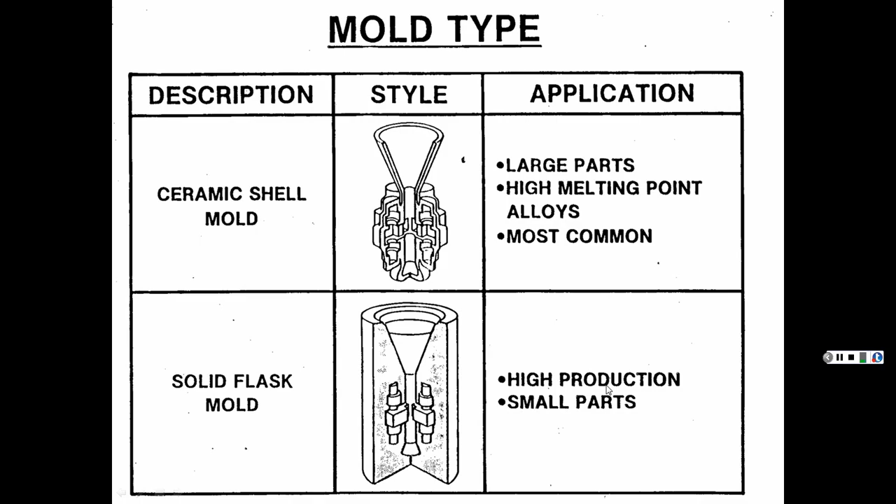And there's a ceramic shell mold, and there's a solid flask mold. These are for large parts, high melting point. These are for high production, small parts. Just depends.

Then you put it in that ceramic slurry, let that set up in the oven, and heat it up some more, and then you can pour out your wax patterns, and heat it up some more to make sure.

And then what? Then you can just break these hollow ceramic shells, and inside you should have your metal parts, which then you'll cut off, and then you can remelt this gating system and reuse that.

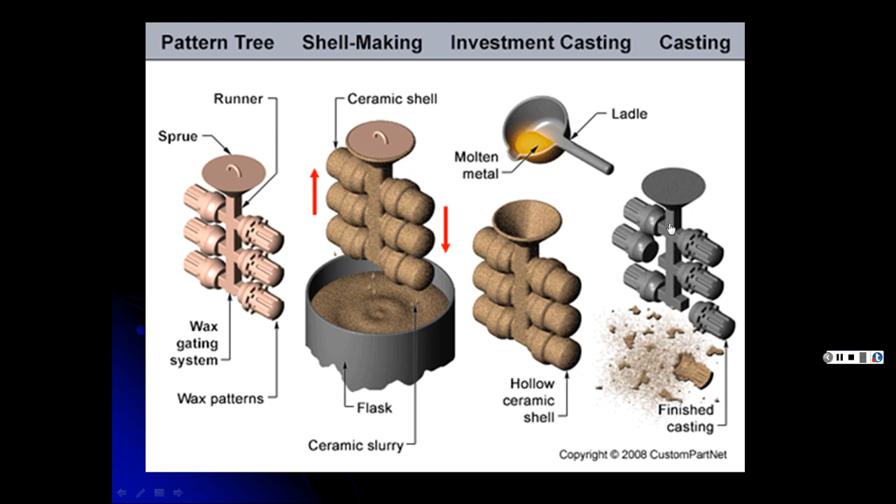And for patterns, they can be wax. Another thing is what they're doing now is they use polystyrene foam. You put that in there, and when you put molten metal in it, the stuff vaporizes. We did that in college, good old Buff State where I'm from, and that worked great.

So you could just cut, you know how easy it is to cut foam. You can just use one of those heated wires and cut all your foam, get the shape you want, and throw that in there, and you're good to go. So it's even easier than playing with the wax.

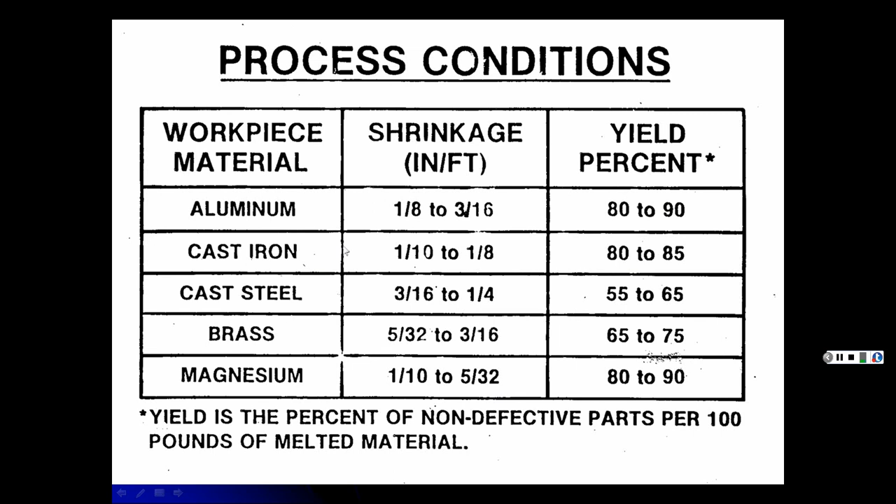So yeah, you look at that, and that has the most, a quarter of an inch shrinkage. Shrinks the most. So your yield percentage is really bad.

Alright, so again, investment casting produces intricate detail and close dimensional accuracy, uses wax or plastic patterns, requires little or no draft. Patterns can be clustered to increase production rate, and patterns are melted out of the non-reusable ceramic molds.

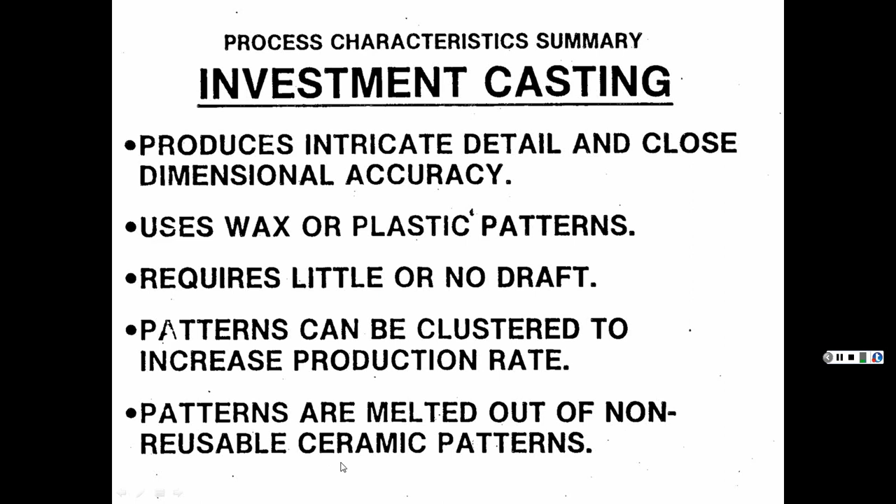Then we get into plaster mold casting, a process in which non-ferrous molten metal is poured into a non-reusable shaped plaster mold. Plaster can withstand temperatures only up to 2200 degrees, but that's a lot - that's pretty good. We made some plaster mold castings in our ceramics class.

And plaster, man, if you have a nice shape, it conforms perfectly. It's a real fine grain, so those molds were just smooth as glass. So when you're done, you don't have to do any machining - that's the beauty of it. So anyhow, it utilizes gravity to feed, and plaster's cheap - it's part of the gypsum and sheetrock thing.

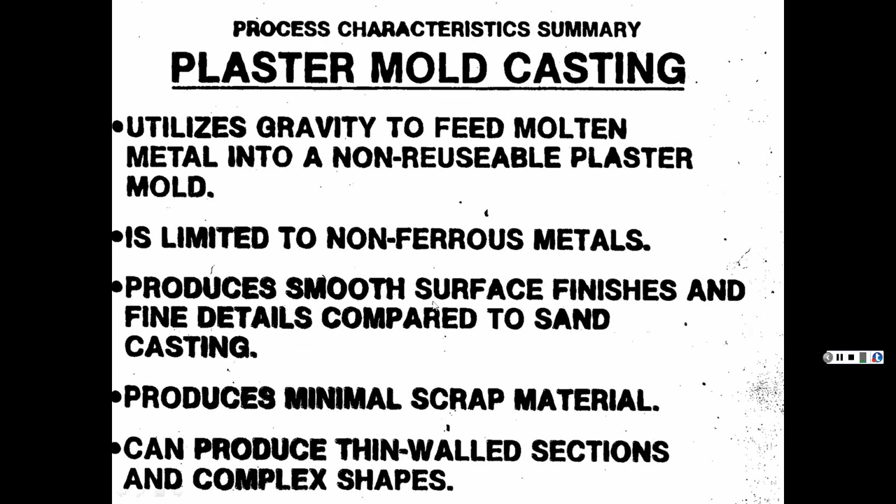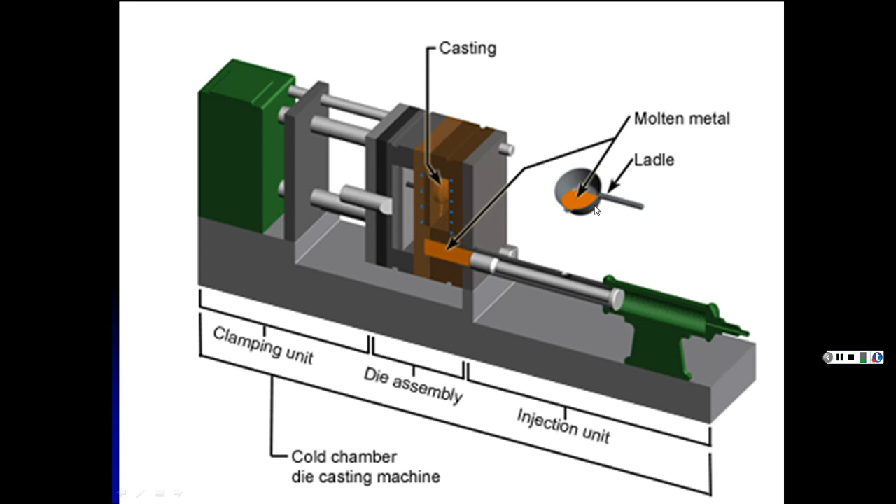Then we get into die casting cold chamber. There's die casting cold chamber, and there's die casting hot chamber, apparently. It's a metal shaping process in which molten metal is forced into a reusable mold and held under pressure until solidification occurs. So because it's cold chamber, it's not shooting it all at once, because these are for hotter temperature type metals, so you have to pour it with either a ladle or a crucible, but usually it's fine detail, so it's smaller, it's a ladle.

So die casting is a manufacturing process that can produce geometrically complex metal parts through the use of reusable molds called dies. The die casting process involves the use of a furnace, metal, die casting machine, and die. The metal, typically a non-ferrous alloy such as aluminum or zinc, is melted in the furnace and then injected into the dies, or it's poured in there.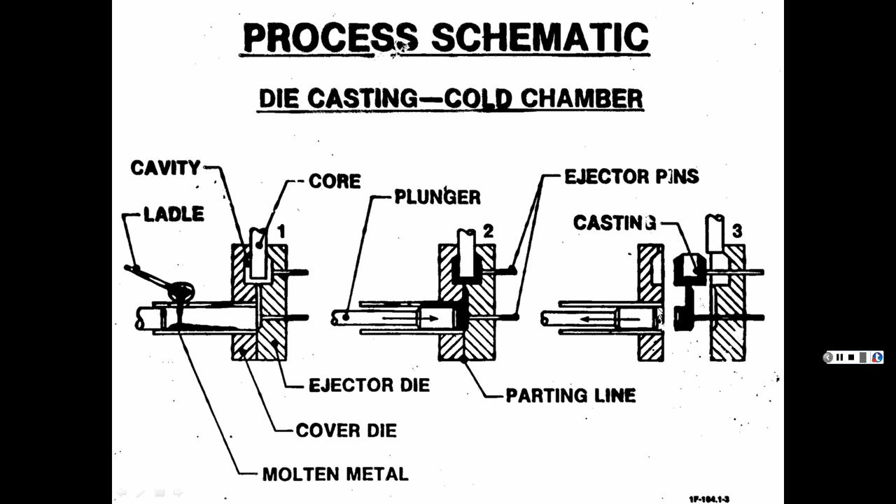The hot casting can do the whole thing, where it has its little pump that pumps the hot metal in there, but it has to be at lower temperatures, because if it gets too hot, it ruins the pump. So this one, the metal they're using, they have to pour the molten metal in there with a ladle, and then it's injected into your mold, like an injection molding machine. And there you go, the two mold halves come apart, and then the part falls out.

Uses pressure to form molten metal into a reusable mold - remember, the other type of casting did not. Produces good dimensional accuracy and excellent detail. Requires minimal machining, typically it's usually fine the way it is. May produce a small amount of flash if things get out of kilter, out of whack. Leaves small ejector pin marks, but that's just because they have to have ejector pins later that pop it out of that mold half - you'll see the very small, fine tolerance where those little cylinders come out to push that piece.

And here's the extra flash on these round pieces - I guess they'll have to cut that off. There's the sprue if they're making a bunch of these, and then there's the finished part. Now, if it's done right, you may not need all of that.

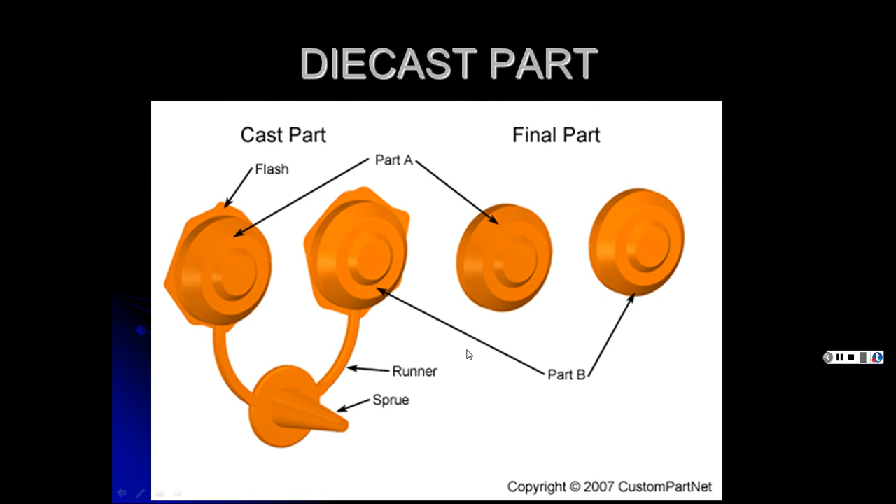Then we get into the hot chamber - again, this is for lower melting temperature metals. It's a metal shaping process in which molten metal is forced into a reusable mold from a hot chamber, then held under pressure until solidification occurs. Here's the plunger, here's our melting pot here, and it's got a little gooseneck that goes in there.

And it pumps it actually into there. So with the hot chamber casting, hot chamber machines are used for alloys with low melting temperatures, or they'll ruin the pump, such as zinc, tin, and lead, although we don't use lead as much anymore, because lead and mercury are not good for human beings. The temperature required to melt other alloys like aluminum, brass, and magnesium is hotter, and that would damage the pump and ruin the machine.

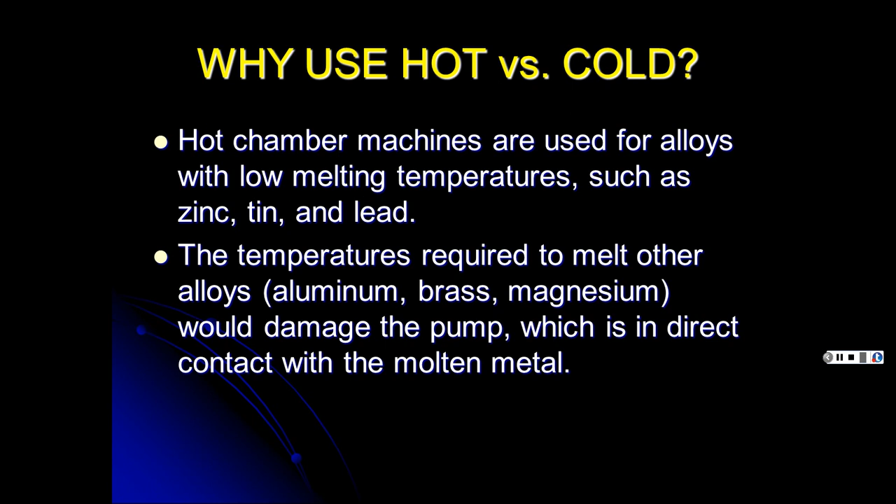So if you have to do aluminum, brass, or magnesium, we use cold chamber. If we're using zinc, the pot metals, tin, lead, we can use hot chamber. It's quicker, it's better, it's easier. You don't have to worry about pouring the molten metal in there with a ladle and all that stuff.

So again, that's the difference. Very high production rate compared to the rest of them. That's the major thing here, and these are pretty much similar to the other ones. And that's it, that was lengthy, I apologize for that. Let me get rid of all this stuff here.

All right, that's all we have. There will be two quizzes, like I said. One is first on all the different nomenclature, all the different names and parts. The other quiz is on all the different types of casting. So we'll look at whether it's sand casting, or no-bake, and know what the difference is. Again, that's just a quick setting resin, doesn't have to be baked in an oven.

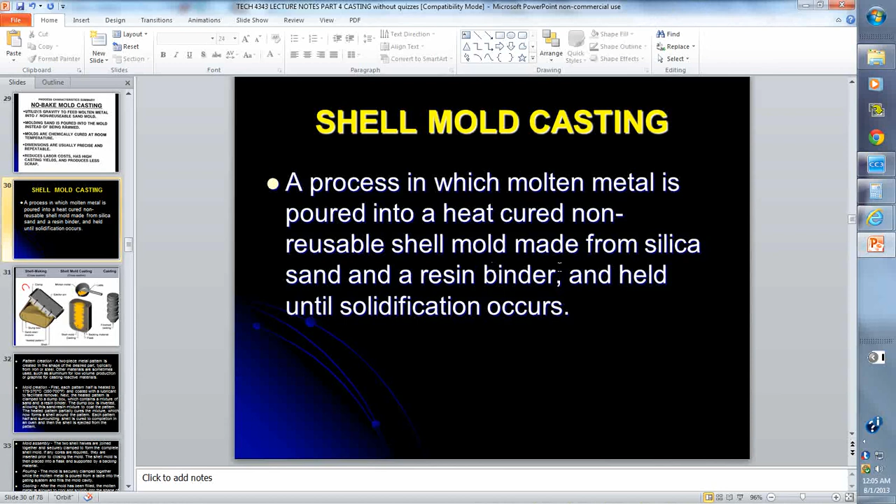Then we get into shell casting, where you do have to cure it, but you put it in this dump box, and the heated actual pattern, and that material, that resin, it's not a liquid resin, it's in powdered form, with the sand. When it gets exposed to that hot pattern, it heats up and then it cures. That resin binds and cures that sand together. But it only goes as far as that heat can come out, depending how long you let it go, the amount of time.

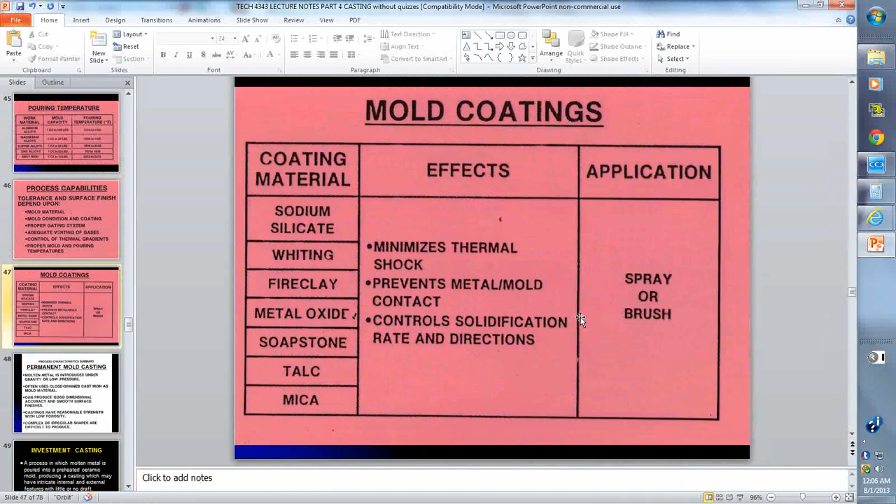And then what's the other ones? Permanent mold. What is our permanent mold here? Where was it here? I was looking for it. Sorry, I was looking to make sure it was in these slides. I could have sworn I said it.

Yeah, permanent mold castings, like die casting, uses a metal mold die that is typically made from steel or cast iron, except it's not forced in there under pressure. You saw the other one injected it, plunged it - they pour it with the ladle and plunge. Here, usually these two halves just come together, and then you just pour it in there. So that's the difference between permanent mold or gravity die casting versus cold die casting and hot die casting.

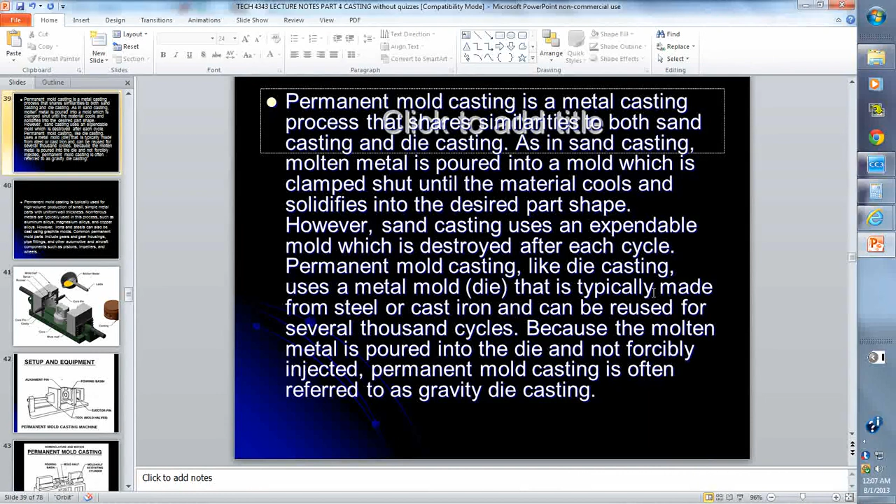I know they get all kind of blurred there. I don't like the way they did that, but that's just the way it is. Just trying to think if we had anything else on that. No, I guess that was it.

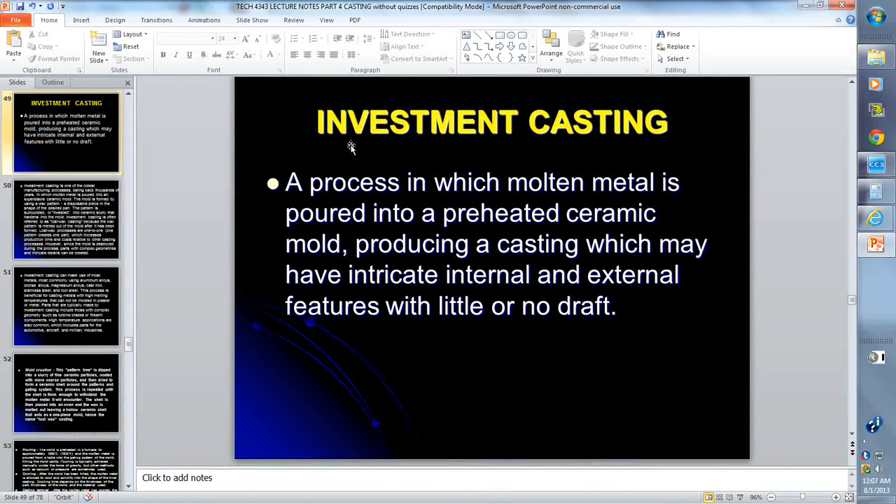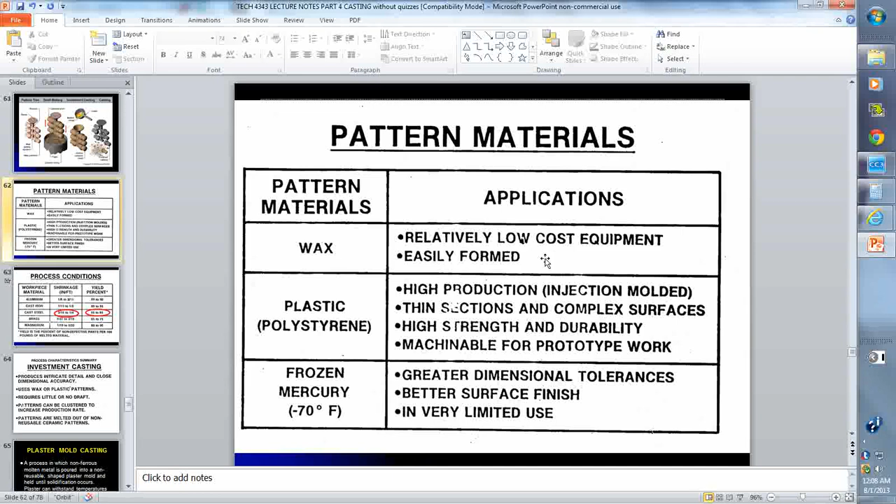Then we get investment casting, and you're going to invest what? You're going to invest in your pattern. You're going to lose your pattern, it's going to melt out of there. That's either wax or it could be foam, whatever. But again, it's a low-cost thing, and with the wax, you can pour it out, and then you can reuse that wax again, melt it, and make another pattern. So you're not really wasting anything. And styrofoam's cheap - we make styrofoam cups out of it, so it's not a big thing.

All right, then we get plaster. Like I said, the only drawback there is it can only withstand temperatures up to 2,200 degrees, or it cracks and breaks apart. But man, that plaster gives you such a smooth glass-like surface. It's nice, so that's the beauty, and plaster's cheap.

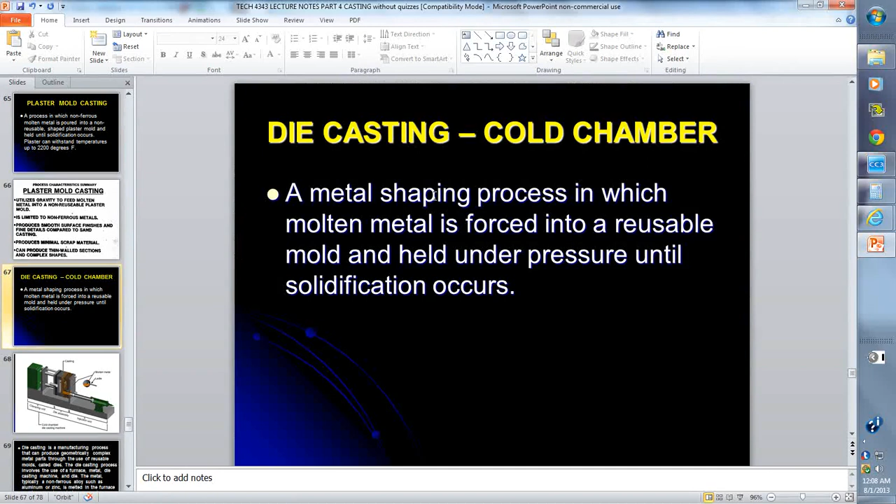78 slides, that's a lot of material, isn't it? Okay, well, make sure you study, go over this, because those quizzes, you only have so much time, and you'll run out of time. I've been seeing a few people get 2s and 3s and 4s, and I see they're getting better now that I gave you a little more time. But I hope that's not just because you're looking them up - I hope that's because you're actually trying to learn the material and study ahead of time. So anyhow, that's all I have this time. You'll see two quizzes pop up for this one, and we'll be in good shape.